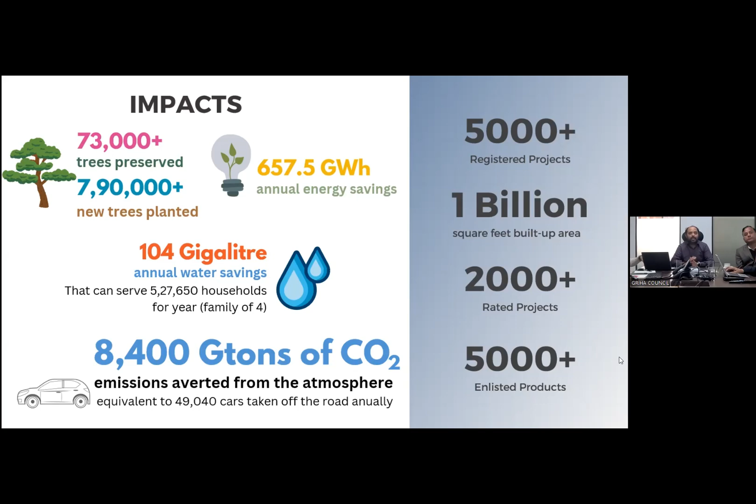And a carbon sequestration of somewhere close to around 8,400 gigatons of CO2 has been absorbed or curbed from the atmosphere till now by just these 5,000 plus buildings. Imagine, this is just 4% of the total construction which is right now coming up in the country. Imagine if all buildings are green, then what massive amount of savings we can make in our society and in our environment.

GRIHA Council has devised a program where we rate buildings. Now, rating is given on a star labeling platform, where we certify buildings from 1 to 5-star level. This is very similar to the star labeling that you see on your AC, fridge, TV, which is given by the Bureau of Energy Efficiency in terms of defining the energy efficiency of particular appliances. On very similar lines, GRIHA certifies green buildings on a 1 to 5-star label with the different variants that we have. We certify existing buildings as well as new construction coming up in the country.

I'll first talk about the new buildings rating systems that we right now have. We have the main rating variant called GRIHA version 2019, which is applicable where the built-up area is above 2,500 square meters. We have another rating variant designed specifically for the affordable housing segment, called GRIHA for Affordable Housing, GRIHA AH. This has been primarily designed to make sure that the projects coming up under the PMAY scheme, which is the Pradhan Mantri Awas Yojana scheme, are sustainable.

We also have a rating program for small scale buildings where if you have a built-up area less than 2,500 square meters, these buildings are rated and registered under the category of SVAGRIHA, which is Simple, Versatile, Affordable GRIHA. This is an online tool that we have developed which helps you design as well as rate a green building.

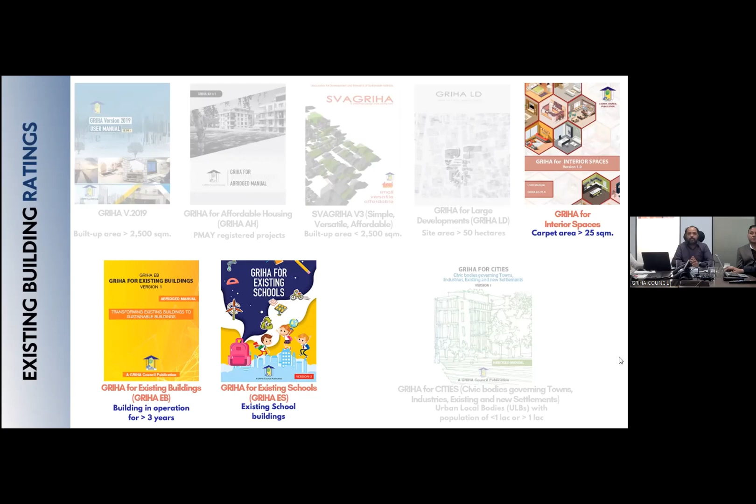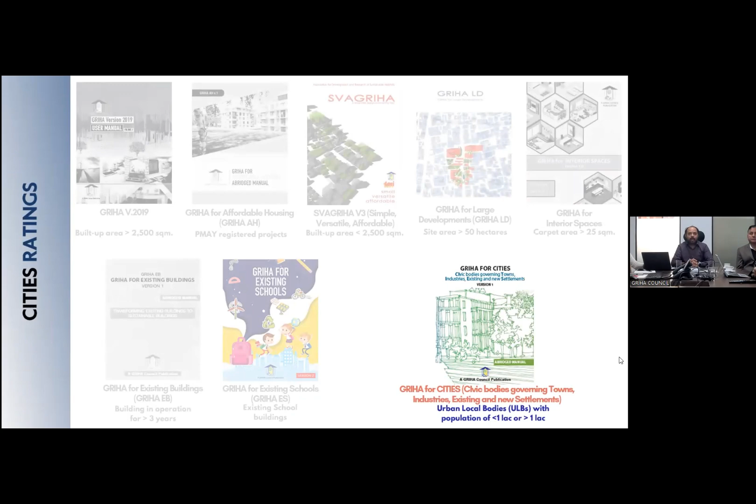We have also devised another rating program specifically for smart cities. I believe we all know that there are 100 smart cities which are going to be coming up in the country. In fact, not just 100, but 100 plus 100 smart cities. And to make sure that our cities are sustainable, GRIHA for Cities is another rating program that we have launched and which is available in our rating portfolio.

Very recently, we have also started looking at infrastructure rating facilities. There are two major infrastructure rating manuals that we very recently launched at our GRIHA summit last year in the month of December. One specific infrastructure is highways, so we are soon going to be certifying highways. And the second is ports for shipping. These are the two infrastructure segments which are going to be certified by us soon.

Not just that, we have also come up with a new version of version 2019. So now the updated version is version 6. This is right now under scrutiny, and by the end of this year, projects are going to be evaluated in this new rating version.

Now, specifically, I'm going to talk about what is this year's GRIHA NASA Trophy brief. So this year, the NASA Trophy brief has emphasized drywall construction. I believe you all must be aware that the GRIHA NASA Trophy always caters to giving you the opportunity to build up on a live project.

We have continued this legacy, and this year again, we have come up with a live project for you, with a twist of making sure that you face certain challenges to build up your project and strive for sustainability at its peak. This year, all the construction that you're doing in your particular project for this year's design brief is going to be based on drywall construction.

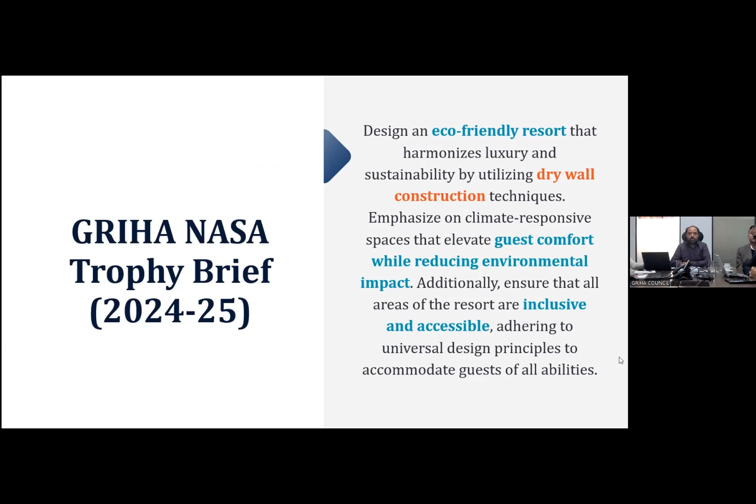Now, in the set of questionnaires that we have received from the NASA Council, there have been many questions about drywall construction, and to decode that, we have experts with us from North India who are going to be telling you about the details of drywall construction. What is drywall construction? How technically is it possible? What are the climatic factors which affect a drywall construction? What are the challenges that you face while you construct it? These questions are going to be answered by the experts themselves once I complete my presentation.

This year, the site which has been given to you is primarily in the outskirts of the Pune region of Maharashtra. The design will include the following multifunctional spaces that are not just limited to what we have right now defined in the brief. So this year, basically, you have to design cottages, leisure spaces, resting rooms for people who are going to come to this particular location to relax.

So basically, these cottages that you're going to design are also going to serve various other purposes for recreation. It could be nature viewing decks, restaurants and cafeterias, cultural pavilions, recreational zones, performance spaces, both indoor and outdoor, whatever you feel like. So this year, we have given you full flexibility to design the project based on your own logic.

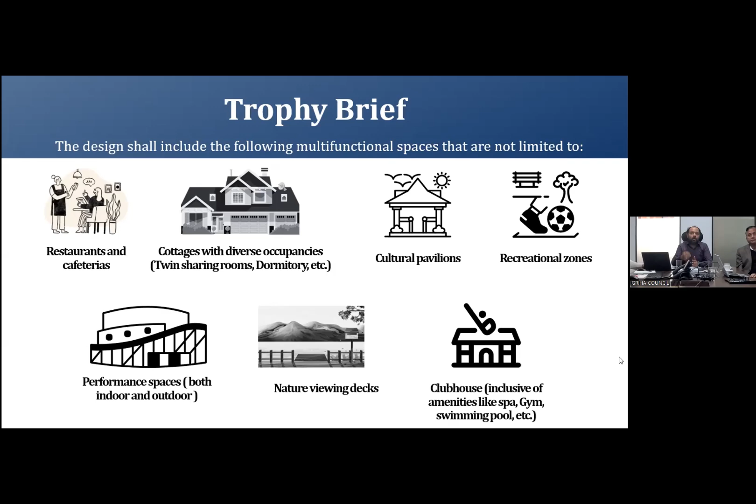Now, there have been a lot of questions in the questionnaire asking what is the occupancy, what is the kind of population that we're going to accommodate on this piece of land. So this year we are giving you full flexibility to design the occupancy based on your own logic. You can design this entire piece of land for one person, whereas if you find that there is space and you can accommodate 1 lakh people on this piece of land, please go for it. But please make sure that you are not compromising on the sustainability aspect.

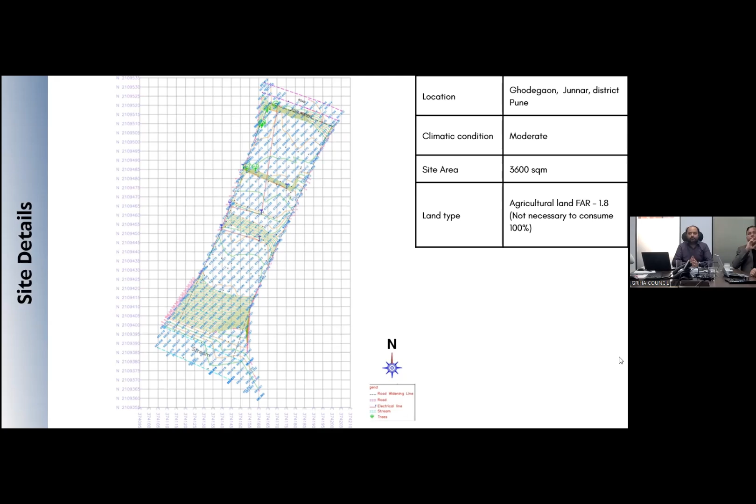In the sustainability aspect, land utilization and resource utilization are very key components which have to be addressed in your design. So please be mindful when you define the occupancy on this piece of land. Also make sure that you follow the local building bylaws of this particular region, because as professional architects, when you enter the market, you need to adhere to the government laws and regulations. So please be mindful that you are not violating any of the statutory approval requirements laid out by the government.

At the same time, we have also defined a location of the site. There have been certain questions asked about high tension wires and poles on the site. Please ignore them. These are temporary and they are going to be removed. So you have to design your project considering that there are no high tension wires passing by on your site. Your entire area is free from any of these hindrances.

You'll also find that there is a canal running right next to you. And this is the plinth area, which is higher than the area on the other side, on the roadside. So there is a gradient of almost 15 meters going downstream to the road. So please be mindful when designing that all the water accumulated on your site is going to fall onto the road, which might hamper the runoff from your site to the outer infrastructure.

So please be mindful that when you are designing, you are not hampering the atmosphere or the region or the context neighboring to your site. This is something which you need to be mindful of when you are designing. Also, please make sure that you have a combination of both open and closed spaces. As for how you can design it, we have given you the flexibility to design it the way you wish to.

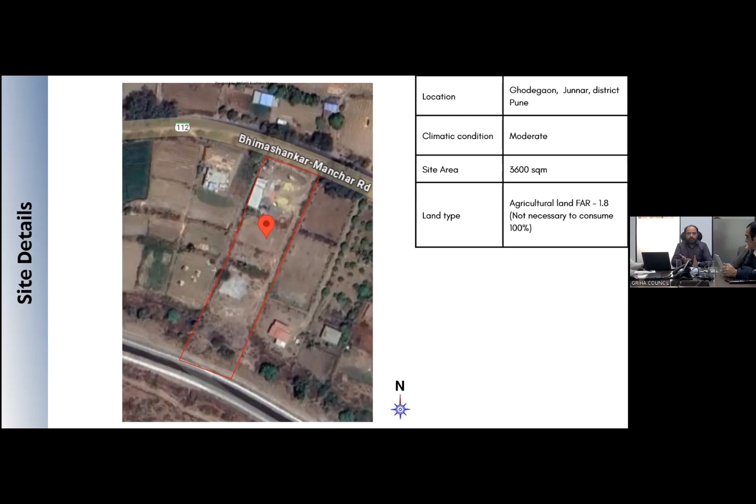There has also been a question that has been recorded: how do you do a comparative analysis of EPI and LCA? Well, for those who don't understand this particular term, EPI and LCA, I'll just give you a brief. EPI stands for Energy Performance Index, and the unit of EPI is kilowatt hour per meter square per annum. That means 1 square meter of my built up area is going to consume X amount of electricity in a span of 1 year.

Now, the benchmark numbers have already been defined in the GRIHA manual. So you just refer to the GRIHA manual, which is available on the GRIHA website without any cost. The soft copy is available there. You need to go to the energy section and you will find the EPI values defined for each and every typology of building. Now, this is a recreational space. So the recreational space will have a certain EPI benchmark number with respect to the climate zone you are dealing with. And this becomes your base case number.

And to compare it, you need to perform energy simulations or energy calculations based on the load that you have or the proposed load on your site. Now, this load consists of your plug load, which means the energy consumed by the appliances you're going to install on your site, plus the HVAC load, that means the heating, ventilation, air conditioning load: the air conditioner, the exhaust fans, the ceiling fans or pedestal fans or wall-hung fans, any sort of ventilation system that you're proposing. In fact, that also takes treated fresh air units into account, plus the interior lighting consumption.

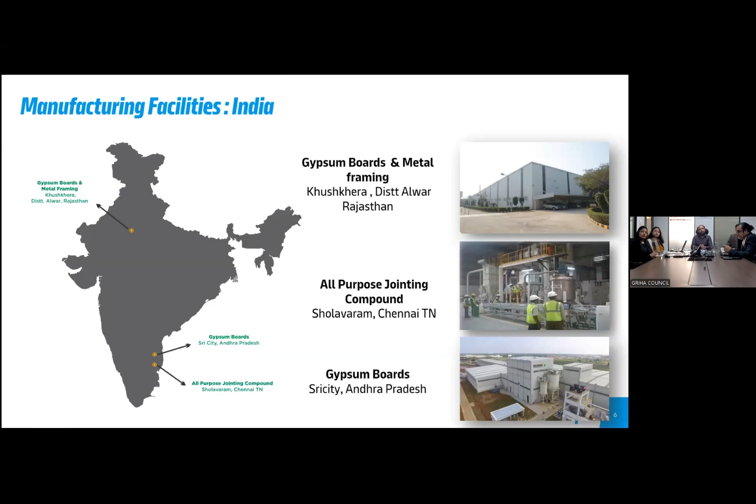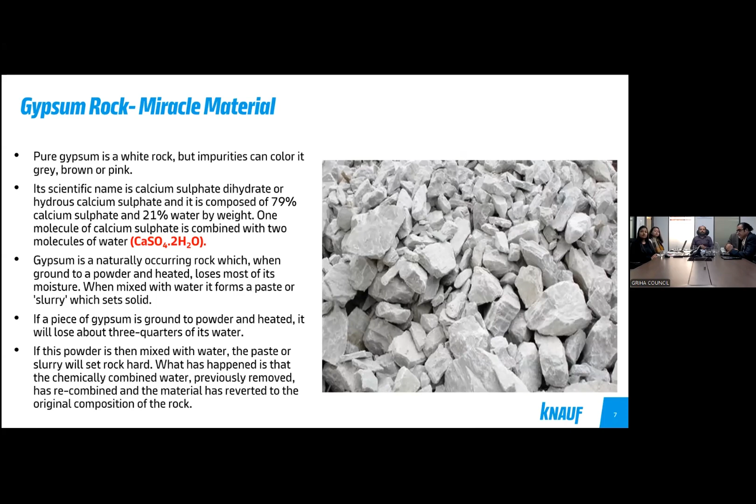And this is gypsum as a rock. Gypsum as a rock means calcium sulfate with 2 molecules of water (CaSO4·2H2O). Now, these 2 molecules of water are very, very important. While you are dealing in gypsum, you have to remember this formulation, calcium sulfate with 2 molecules of water, because this formula plays a very, very important role in case of fire, like when you design fire-resistant systems, ceilings, and other applications.

Here is the sustainable part. Gypsum as a raw material, we don't only get it from the land mines, from Mother Earth. It also comes as synthetic gypsum. Synthetic gypsum is something we get from sulfur dioxide, which is currently being released into the air from thermal power plants. The thermal power plants treat it, and the residue we get as gypsum, as calcium sulfate with 2 molecules of water. So gypsum as a raw material also plays a very, very important role when we design a building and call it a sustainable product, a green product.

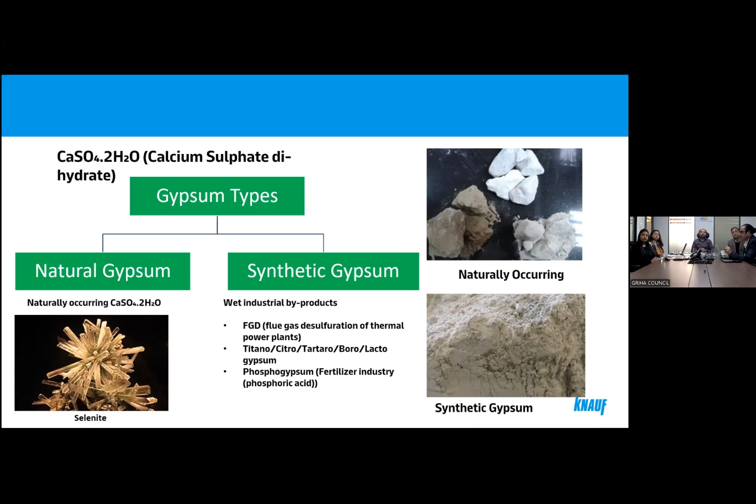What can Knauf offer? Number one is seamless and modular ceilings, when you design any kind of infrastructure. For information, plasterboard or Aquapanel systems can be used in any type of building, be it hospitals, IT centers, healthcare, hospitality, or education, schools, anywhere. So we have got fire-rated ceilings, acoustical ceilings where you deal in acoustics, like in studios, multiplexes or cinema halls, metal ceilings, and especially design ceilings.

Then the second part is performance drywalls. These drywalls need no foundation. Drywalls start from the ground level and can go up to 16 meters. That's how drywalls are designed, without any foundation. They can be curved, fire-rated, impact-resistant, or high acoustic drywalls.

The third application is typical when we design buildings and don't find ways to use wood or fire-resistant materials. It's a beam and column encasement system, if it is a steel structure, and a completely dry lining system onto the brick walls. We don't need a sand cement plaster or even a gypsum plaster. Then Knauf is also into false flooring, insulation, and roofing systems.

But for your information, the fourth part is very important: interior drywalls and exterior drywalls. Exterior, it can be false ceilings, drywalls, or linings. We design a system on the exterior which is not a brick block wall. It is a completely lightweight construction with two cementitious boards on the outside, a hollow cavity, and on the inside two plasterboards. So you get a lot of thermal insulation, and you've got fire and acoustics, and the cavity can be filled with an insulating material if required.

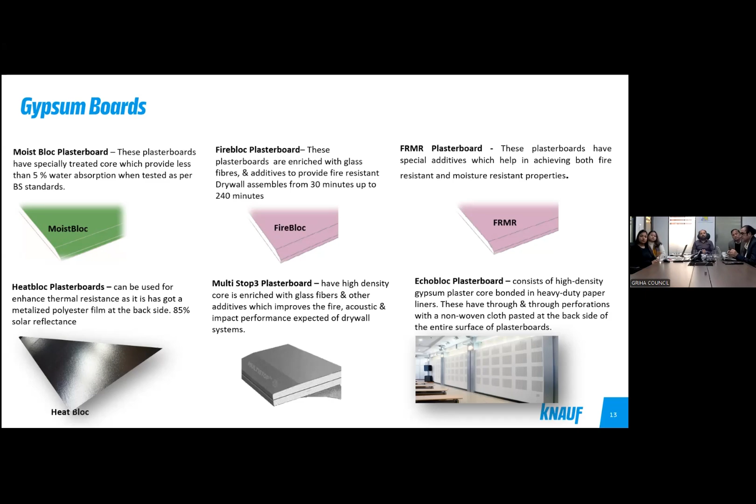The sixth one is an Echobloc plasterboard. Any kind of plasterboard which doesn't have perforations - any plain plasterboard - will reflect sound. But when it comes to this perforated plasterboard, you can see it's perforated, and this always absorbs the sound.

It cuts down the echo. This brings you speech intelligibility. Same plasterboard, but it gives you a lot of acoustics in terms of absorption. So this has to be designed in an application.

You can raise queries whenever you want. We can design this system and offer it to you. So this comes along with the system. It can be used in ceilings, drywalls, and wall panelings, for good room acoustics.

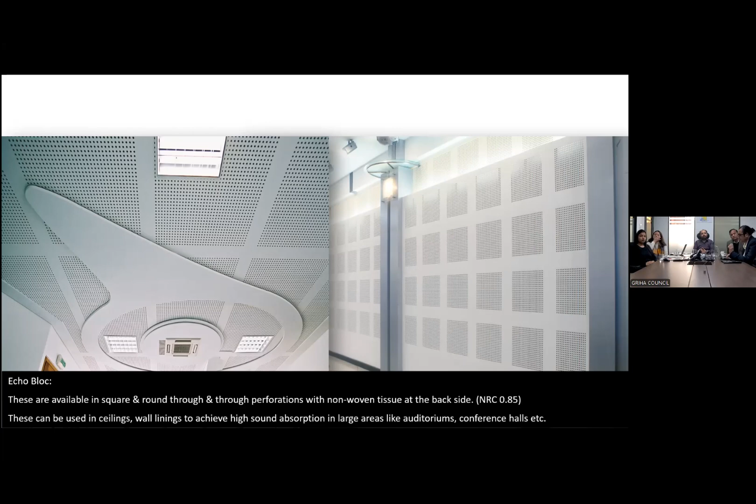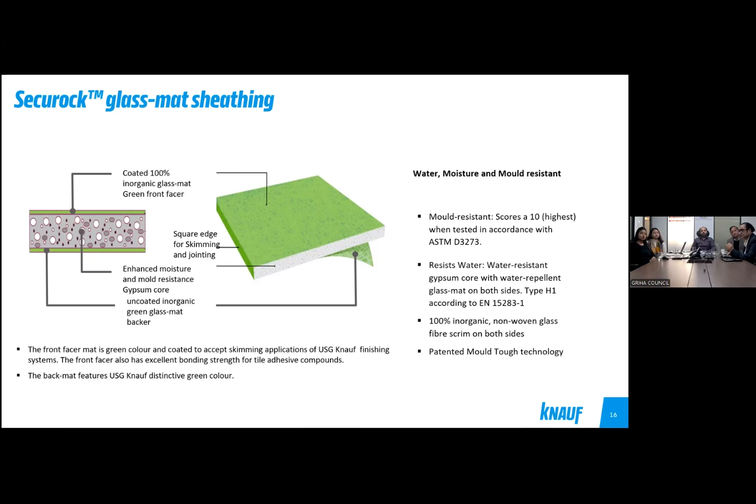So you can use this in bathrooms, wet area applications, kitchen areas, your hospitals. This has got an additional feature of mold and mildew free - good for your kitchen areas and areas more prone to leakage or something of that sort. Then we have got all the metal profiles.

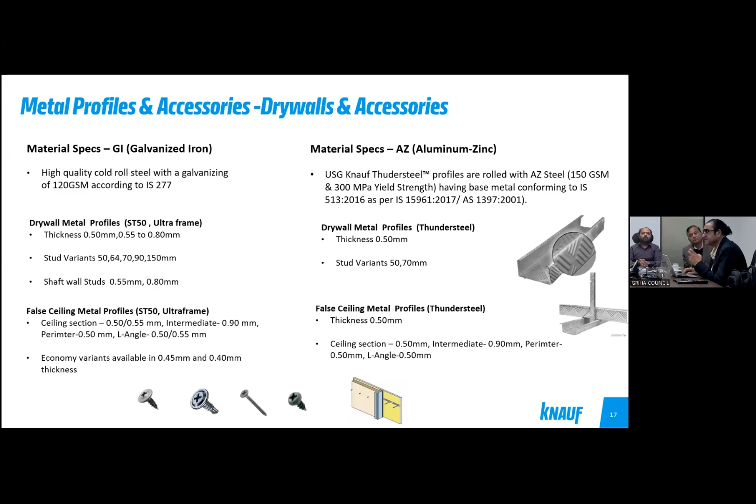Now all the metal profiles, and all the plasterboards, have got an EPD qualification. For the metal profiles, we manufacture these for drywalls as well as ceilings, because this is a structure which has to be made where the plasterboard is secured.

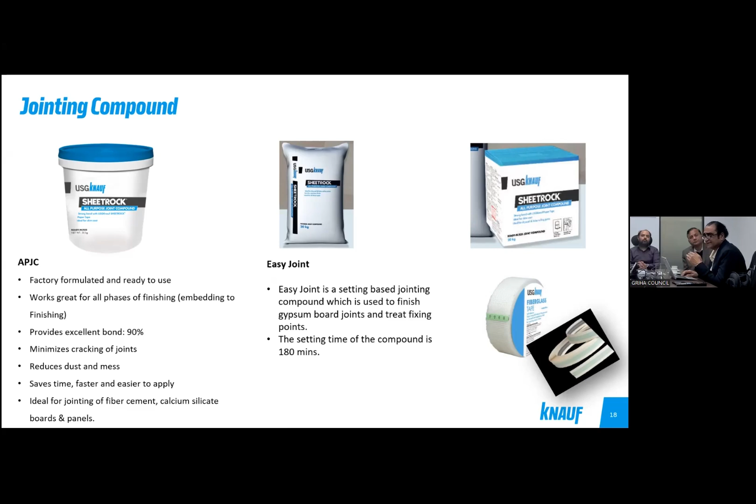This is the jointing compound. Whenever two plasterboards meet, we can do a jointing finish. We can give a seamless finish. Gypsum plasterboard is the only plasterboard which can be finished to a seamless finish, any kind of finish. It can take a curve, it can take any kind of ornamental ceiling, and still be finished to a seamless finish.

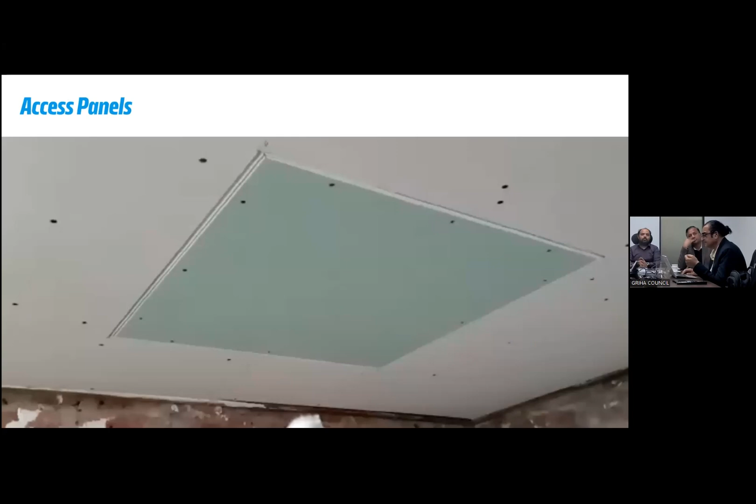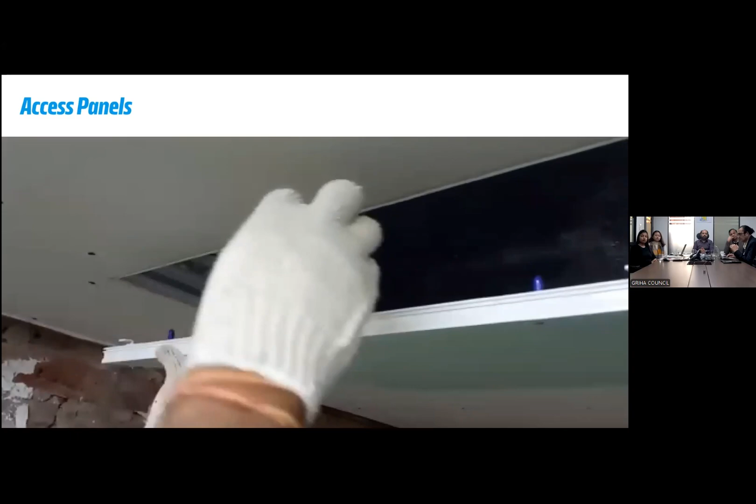These are access panels. This plays a very important role when we use these ceilings as a sustainable solution. For any kind of services passing above the ceilings, we can create an access panel, which is a very easy way to create that space to go up and carry out any kind of maintenance for the services above the ceiling. Very easy to fix - this is all made up of plasterboard and metal profiles.

These are performance assemblies. Now this is the subject of dry construction application. For any kind of building, when you talk about a plasterboard, you have to choose a plasterboard - like a moisture resistant plasterboard, fire or acoustic plasterboard - and the framework, which is a non-structural framework.

The jointing, finishing, the insulation, and the accessories - you will get a desired performance. Now, desired performance is like what? Fire, acoustics, your structure performance, your carbon ratings.

This is very important to understand that all the drywalls, there are n number of drywalls, all of them have been tested, and these are very lightweight construction techniques. It can be used in any application, any kind of building type.

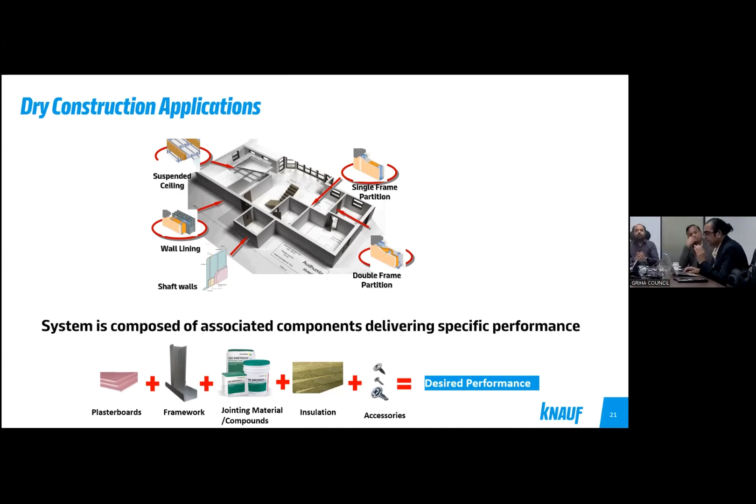Like see here, this is a typical construction. When you take a stud, this is a metal stud, and these are floor channels. On the left side there's a plasterboard, on the right side there's a plasterboard, and in between there's a cavity. That is a single layer drywall, which can go up to 8 feet height.

Similarly, in a double layer, there are 2 layers on the left side, 2 layers on the right side. You can choose the plasterboard - moisture resistant plasterboard, fire resistant, a combination of FRMR, or multi-stop plasterboard, any kind of plasterboard. Or when you tile it, you need a Drystar plasterboard with a fleece.

Any kind, and then the third one is a twin framework, where you take 2 separate frameworks, tied up with a frame in between, which acts like a cavity. So it gives you very sound thermal insulation.

Then you also design shaft walls where the lift moves. You don't have to construct a brick block wall construction around the lifts, where the lift or capsule moves up and down. We can design the buildings with shaft walls.

So whenever your lift comes, whether it's a hospital, healthcare, or any educational sector where the lift is, you can encase it with shaft walls, and that gives you 2 hours of fire resistance. It complies with National Building Code as well - a sustainable solution that meets all the codes.

It can take any kind of curved walls. We can fit it, because we have got a jointing compound, it can be finished as curved walls. It can be used in wet area applications - we can tile it, we can use 19 millimeter thick marbles or other thick marbles on it.

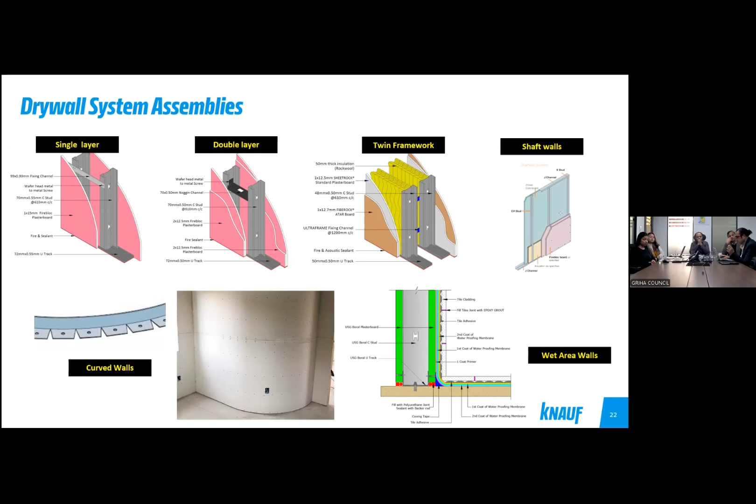This is the selection criteria for fire resistance. Whenever you design a building with drywalls, you need to ask what kind of fire resistance you need, apart from the sound insulation - what kind of fire.

Acoustics, maximum height - you can go 8 feet, 10 feet, because all the drywalls can be designed up to 16 or more than 16 meters. Seismic criteria - what kind of weight it is, because you are constructing on a lightweight construction, or you're getting a mezzanine floor.

The thickness of the drywall, because space is a major consideration. Finishes, like tiles, paints, wallpapers - what kind of finishing? So this drywall selection criteria is very important.

Similarly, the false ceilings, linings, and the beam and column encasement systems - wherever the steel comes, like here is the steel beam, we can cover it and give fire protection from all 4 sides. The reason is that in any kind of building, whether hospital, healthcare, IT sector, education, or even a temple or religious space, you don't need wet construction.

It's all hollow construction, dry, lightweight construction, very fast, no usage of sand, cement, water - minimum amount of water. That's where we call it sustainable solutions. We have done a lot of study along with GRIHA, so that we can provide you the numbers, and that gives you low embodied energy and high sustainable building solutions.

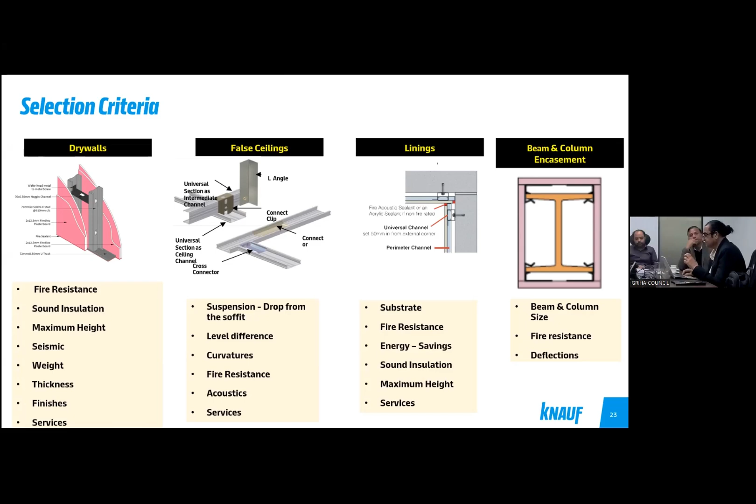Very fast to erect. There is also a report which you can refer to, that shows how much savings we have on the construction side in terms of labor and time savings.

Why is gypsum so effective in fire? As I told you, it's calcium sulfate with 2 molecules of water - that is very important. When the 2 molecules of water come into play during a fire, it converts into steam and stops the spread of fire. That's why gypsum is so effective in fire.

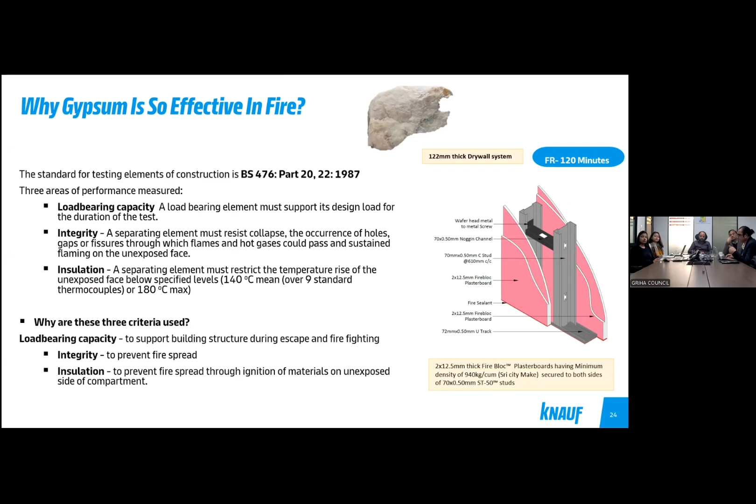I will also show you this - you can design it so you don't need to keep in mind brick wall limitations. You can hang anything, like a calendar, your picture, or any kind of TV, LCD, or anything.

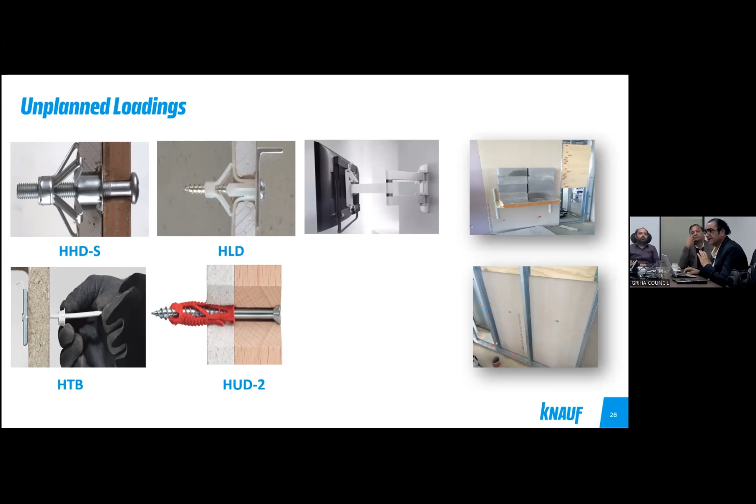Gypsum drywalls have fasteners and fixtures which can be punctured directly into the board. There's a technique, and you can hang any amount of load. There are two ways to do this - one is known as planned loading, when you design things accordingly.

Now let's talk about exterior wall solutions. Exterior is something on the exterior side of the building - it is what makes the building envelope. We have the product Aquapanel cement board outdoor, which is an exterior wall solution, but it can also be used for facade walls, curtain walls, exterior ceilings, and wall technology.

This is a typical building of ITC Kohinoor in Hyderabad, where you can see in the ground portion there is no brick block wall construction - it is all cementitious board. When we say cementitious board, the outside is a framing with cementitious board, and inside can be plaster board, forming a complete wall. The balcony coverings and porch areas are all done with exterior drywalls.

This can be designed to take care of all atmospheric conditions - rain, water, seismic activity, wind zones, all of this. So it's a complete solution, and apart from being sustainable, it also provides fire and acoustic performance.

This product is called Aquapanel. It's a cementitious panel with a fiber mesh on both sides and Portland cement in between as the core and edge.

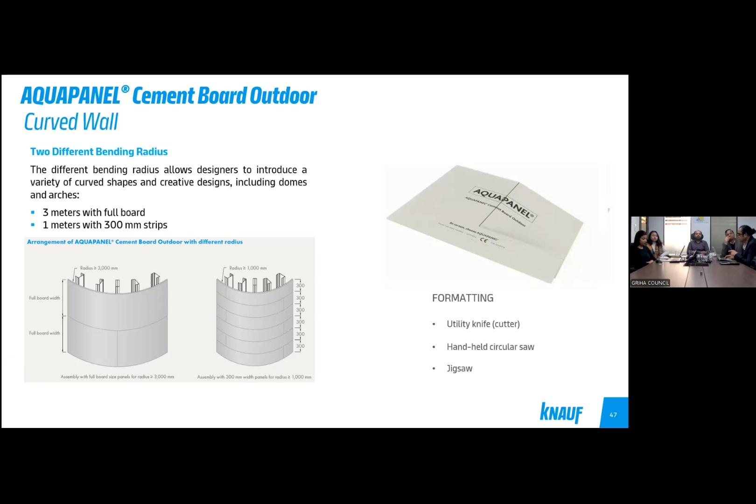It's very flexible - except for an ornamental one, this can take a curve, fitting into the architect's imagination. As you can see here, it can be easily curved to a 3 meter or even 1 meter radius. It bends like paper, is very easy to cut with a knife, and this forms a wall that we can create.

Inside can be plasterboard, with vertical steel stud members and insulation, and outside are two layers of the aqua system, followed by a cementitious coating of plaster, ready for paint. From outside, unless you touch it or knock on it, you won't get a hollow sound - you'll never know if it's solid or hollow construction.

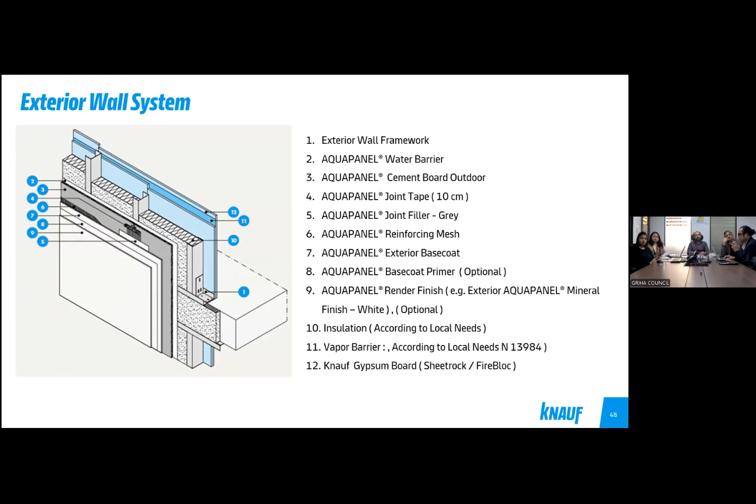This is typically an exterior solution - these are the vertical members as studs, and these are the building paper or vapor barrier membrane for protection. When there's any condensation on the exterior, it breathes, and this is how it gets finished.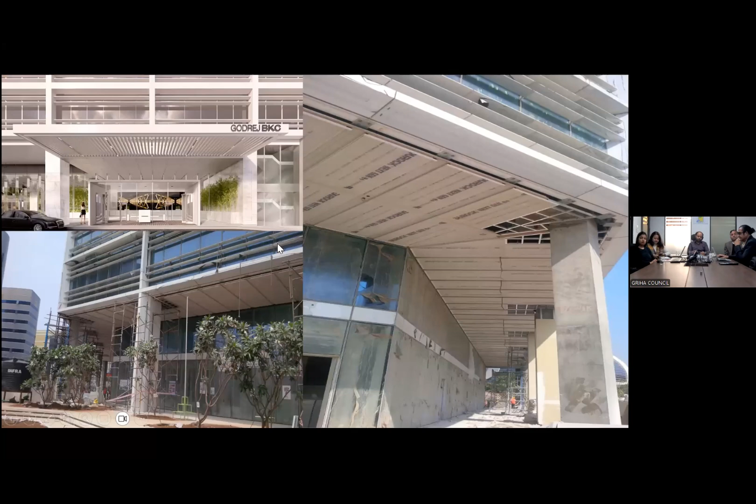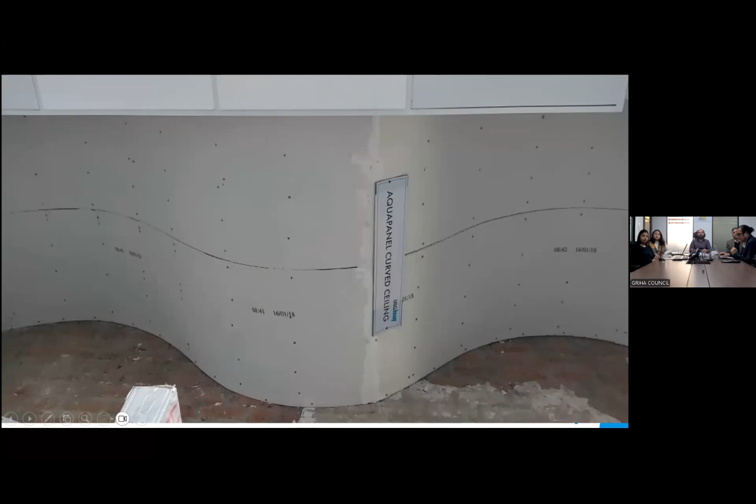These are the exterior ceilings - for any kind of building, exterior ceilings can also be designed, along with all the other performance parameters, including exterior wind pressures. Here you can see it can take a curve too - it bends just like the Aquapanel boards and plaster boards used in drywalls and ceilings.

These relate to the study we did with TERI and GRIHA. It shows that when buildings are designed with Aquapanel systems and plasterboards inside, HVAC energy consumption savings are 12.42%. Construction cost is 29% lower than conventional systems like brick block construction, execution time is 18% faster, and water consumption and CO2 emissions are 19% less. This is a sustainable solution for both exteriors and interiors from Knauf India.

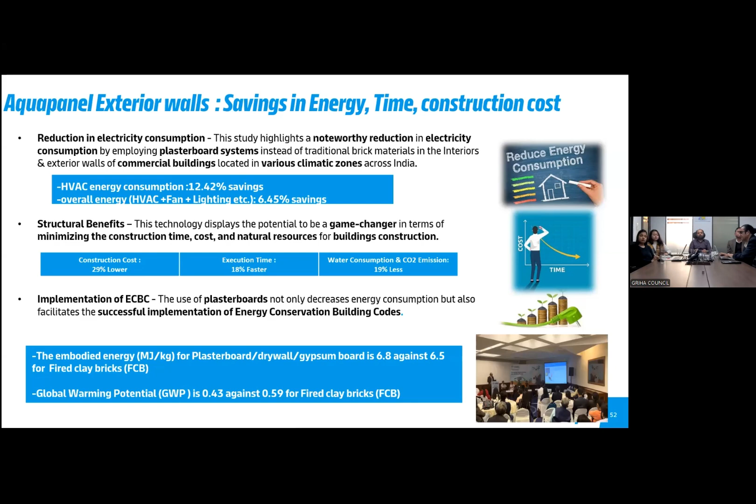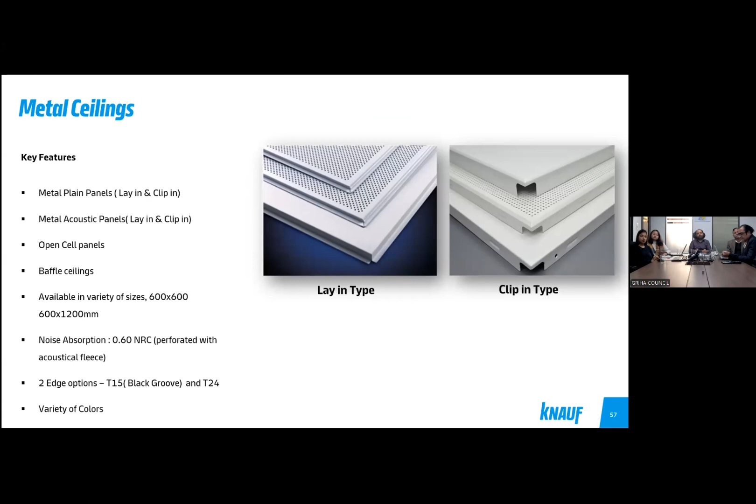The rest includes modular ceilings, like mineral fiber tiles and lightweight acoustical ceilings. For healthcare, we have metal ceiling tiles - a whole range of metal ceiling panels, perforated and plain, for wet area applications or critical applications requiring less metal, and more from an aesthetic point of view.

These are the grids, and this is gypsum plaster. Gypsum plaster means that if you're creating a brick block wall, you don't need sand cement plaster because it doesn't require any water or sand - it's a complete sustainable solution with energy savings. That's gypsum plaster.

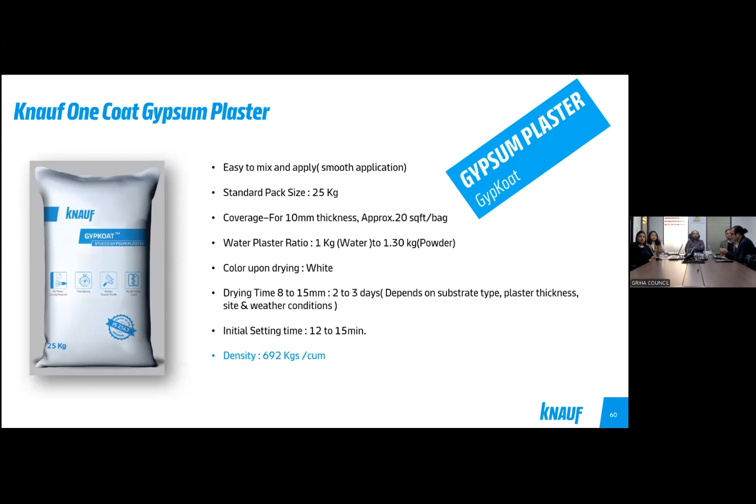And then this is all we do. Train people, equip people, people like you, people like me. We have a facility to train people. That's where the Knauf range of products are there.

Over to you. Thank you so much, Sipalji, for giving us a brief and detailed points of how a drywall construction wall is created. I would also take this opportunity, Sipalji, to ask a few questions which I believe the participants, the students, might be facing as an architect.

There is always a paradigm or a mindset that we have, that drywall constructions are not safer and securer as compared to a red clay brick or a solid wall. How can we break this in terms of the safety of any particular structure when it comes to drywall construction? See, that's a very nice question, and a good question for a beginner.

But see, when you are using it on the interior side, in all the interior drywalls, these are first of all environmentally friendly, but quite safe when you talk about using it in hospitals or school areas or any kind of working space. These are sustainable. So this adds to sustainability, and this is completely safe because the gypsum comes from Mother Earth. And it is calcium sulfate with 2 molecules of water.